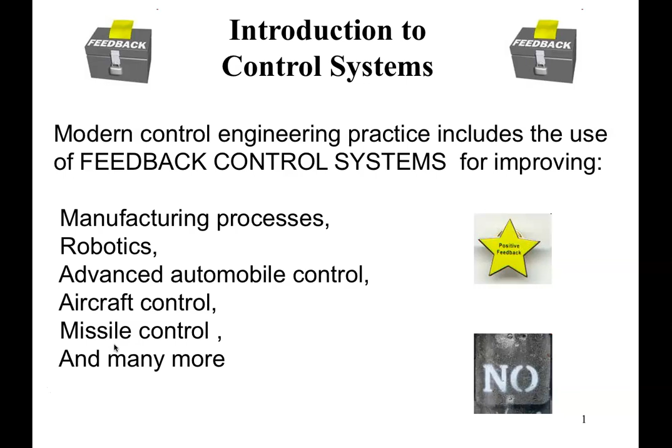In manufacturing, for example, that involves control engineering, robotics, aircraft, and so on. It is something that you don't come across very often or in a very obvious way, but it is used very widely in all sorts of industries. Now, I can give you some examples how the control is applied. Typically, when we refer to control engineering, we are talking about feedback control. Feedback control is a technology that relies on some kind of measurement, so you have a knowledge of what is happening.

And cars are a good example. Nowadays, car engines are managed by computers, and their fuel efficiency is much, much better than it used to be, compared with, for example, only 20 years ago. The efficiency of fuel has probably doubled. That's all thanks to the control, because it measures how the fuel is burned and it controls the mixture of air and petrol injected into the engine.

Autopilots: nowadays, people can fly airplanes without the interference of pilots because it measures the height, it measures the speed, it measures the conditions outside, the wind, the weather, and so on. Robots, again, rely on sensors and they rely on computers to actually find their way and to do whatever they are assigned to.

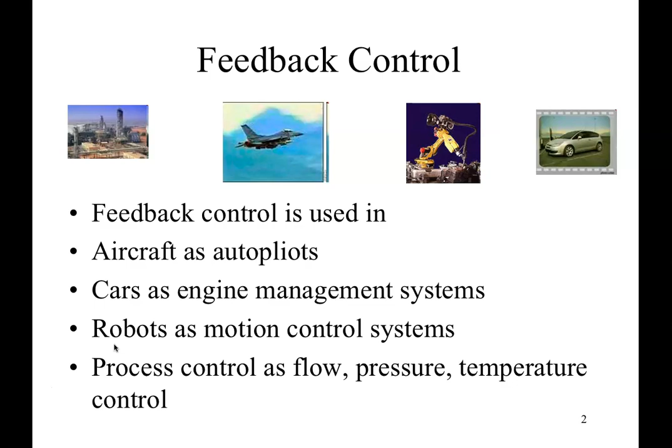Now, I kept talking about feedback. Feedback is what you see, for example, here. In the middle of this slide, you will see a process. If you look at the block diagram on the right-hand side, the object we want to control is called a process or the plant. And the plant has some kind of output, and that is measured through a sensor or a number of sensors. It sends back to the comparator and compares with what we would like this plant to do. And that process is known as the feedback or the closed loop.

You can see there is a closed loop happening. And the difference between what we want and what we measure is fed to the controller. Now the controller in the middle decides what to do for the plant. So you send a signal for the process to take action so that the actual output will get as close as possible to the input, or the desired output. That process is known as the closed loop.

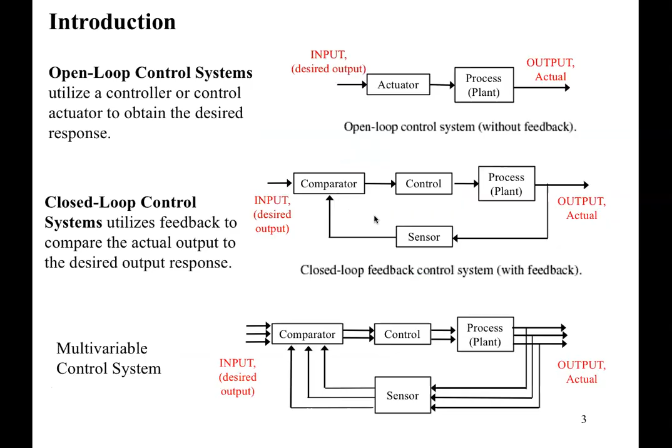Just to give you an example of feedback. So if you look at this diagram, what is happening here is we have a fluid tank, and fluid comes in from the top, and fluid comes out there. Now the aim is to keep the volume of the fluid in the tank at a constant level.

Now the fluid may come in at different speeds. Okay, it doesn't have to be a constant flow rate. You have to control the valve here, which is the actuator. That's a device that controls the actual action of your plant. You have the control there. So this guy there just turns the valve, maybe opens it a little bit more or closes it a bit more to control the output flow rate.

Now, if I block that little window there, the guy doesn't have an idea what is happening. So there's no way you can actually know how much control you have over the valve. But because the guy has this access directly, he can see what is happening inside of the tank, so he can actually adjust this. So here we have the actuator, which is the device that controls the flow rate.

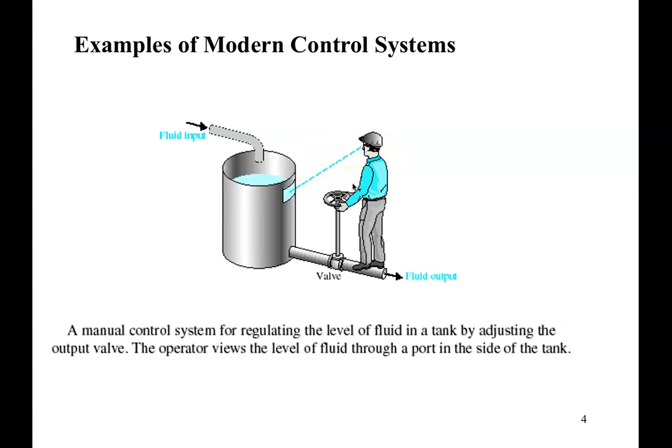Then there's his eyes, which act as a sensor to detect the height of the fluid or the volume of the fluid. And then his brain acts as a controller or as a computer to tell his arms or hands how much to turn, how much to close or how much to open. Now, of course, control systems most times don't necessarily involve human beings.

So this is another example, a fairly simple scheme, but similar in principle to the previous example. So what we have here is a tank with water coming in. It goes through here, but the water at the end of that pipe can be blocked by that little valve. The valve is controlled through this lever, and at the other side of this lever there is a float. The float goes up and down according to the water level inside of that tank.

Of course, sometimes we can lose a little bit of water, like steam coming out of the water. Sometimes the water level may change. So the float acts as a sensor. The valve acts as an actuator. So when we lose water, the level comes down, the float drops. When the float drops, that valve opens a little to let the water come in until the tank has enough water that, as the float goes up again, that closes that lid.

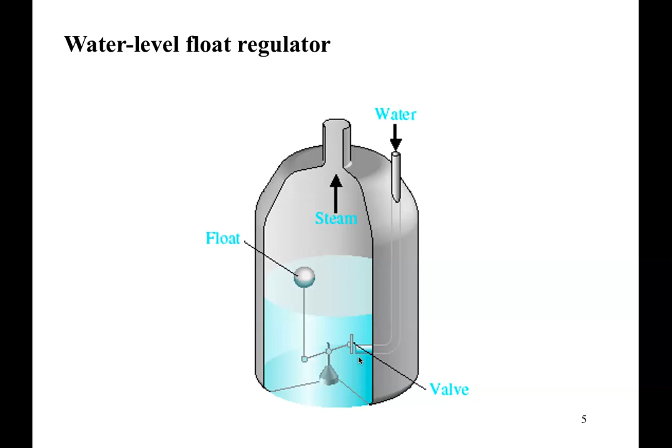Now, most of us probably drive. Driving a car is a multitasking job. I have a block diagram here just to illustrate what is happening. So we have a car here. We have different measurements: speed of the car, the position of the car, and that kind of stuff. Measurements don't have to be an actual hardware device, but could be your eyes and your body as well, so you can feel it. And the measurements are sent to this comparator and compared with what we would like it to do.

Now you, as a driver, are in control of the steering, for example. But you are also in control of the pedal. You can brake, you can accelerate. Steering involves the job of following a road. So your eyes are the sensors. You know where your car is. Your hands are the actuators together with the steering mechanism. So you steer the car and you follow the road. The road bends to the left, and you steer towards the left. The road bends towards the right, and you steer towards the right.

And that input is a road profile. You are required to follow the road, and the position of the car on the road is the actual output. So if you're not careful, you might end up in a ditch by the side of the road. And of course, you follow the road by adapting to road conditions. There might be a side wind that tries to blow your car off the road, and you have to steer it back a little bit. That's called disturbances, the conditions outside your control, but you can control your plant, which is the car in this instance, according to outside conditions.

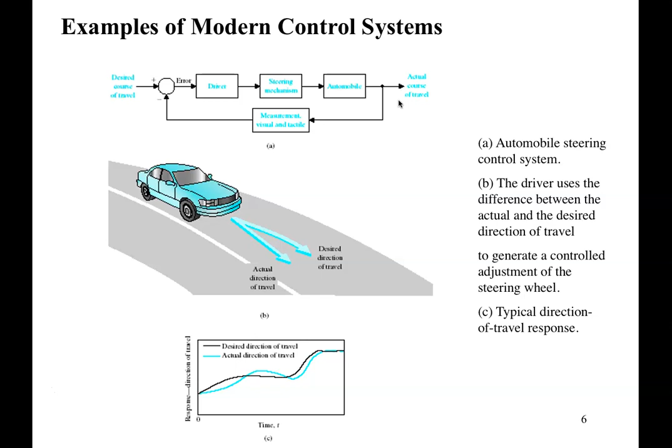So these are the things, examples of it. Now, of course, driving a car nowadays doesn't have to involve humans. Autopilots are nowadays fairly popular. A number of leading tech companies are actually trying to roll out these driverless cars. But the concept of driverless cars goes back perhaps at least 20, 30 years.

This is probably one of the first driverless cars in the world. It was made by a research team at MIT, American. And of course you can see quite obviously the technology then, 30 years ago, was not as advanced. There are sensors, and you can see all sorts of sensors on the car. They're not as compact as we have today. But they were in existence. The pioneer work at that time actually paved the way for the driverless cars as we know today. Okay.

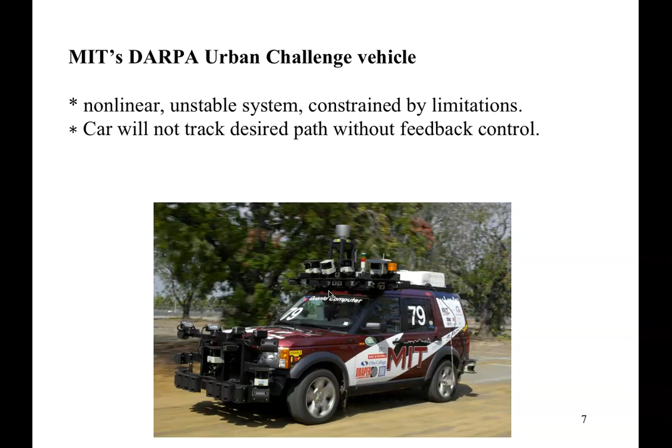For this course, we will have to get used to this idea of using block diagrams, okay? Because it's one of the very useful tools that we use to study, analyze, and design our controllers. So this is just typical of what we normally have. We have a plant or the process, which is an object for control. We have an actuator, which is a device that makes things happen.

Now, often we merge the two together and treat them as a single unit, or treat the actuator as part of the plant. And we take a measurement of what we want and send that back. And we compare that with what is required from the plant. And then the difference between what is required and what is actually happening is fed through this central device called the controller. And this is really the focus of control engineering, how to design that controller to give you the best output, or the output as close to the input as possible.

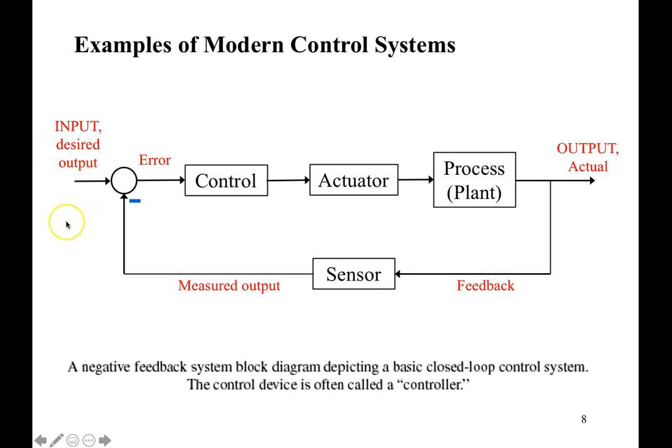Okay. Of course, the design process involves a lot of knowledge of analysis of the plant. You need to know what the plant wants to do first. So you need a good knowledge of the plant. So the course will start from looking at the process, to see how best to analyze a plant in a theoretical way, and then how we can design the controller according to different requirements.

So, typical objectives to design a controller. First of all, you have to stabilize the system. A system that is unstable, that goes out of control, is no good. So we need to make sure a system is stable, it is under control, it does what you want it to do. We don't want a system that has a mind of its own, that doesn't listen to the desired output. Okay, that's the first requirement. Stabilization is a very, very essential requirement for control engineering.

Sometimes you have different objectives. In some cases we may want the output to follow the input, but the input is a constant. It's a design set point. That kind of problem is known as a regulation problem. The input doesn't change, or changes very little over time. Or your input might vary, go up and down quite a lot, and your output needs to follow that constantly changing input. That problem is known as a tracking problem.

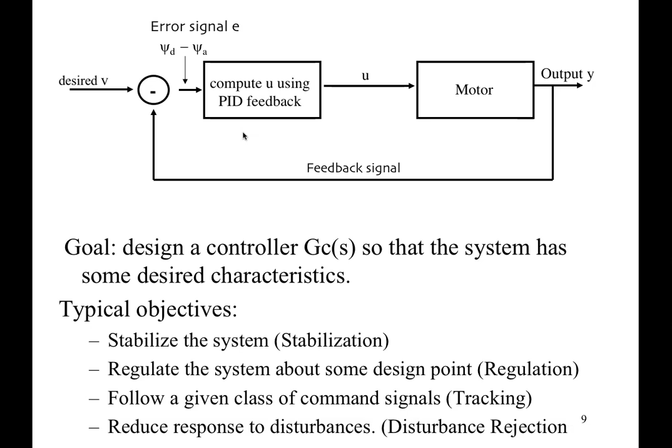Following a road is a tracking problem, because the road profile changes. You drive around a bend, around a street corner, and you have to follow that. So the road conditions change as well. You might have side winds, narrow roads, you might have to change lanes from one side to another. These are the disturbances, but you have to follow the profiles.

So this is a very light touch for the first session, and I'd like you to think about possible examples of real-life experience where the idea of feedback is applied, and explain how feedback in these examples may work. Just have a think. Okay, it's fairly light touch.